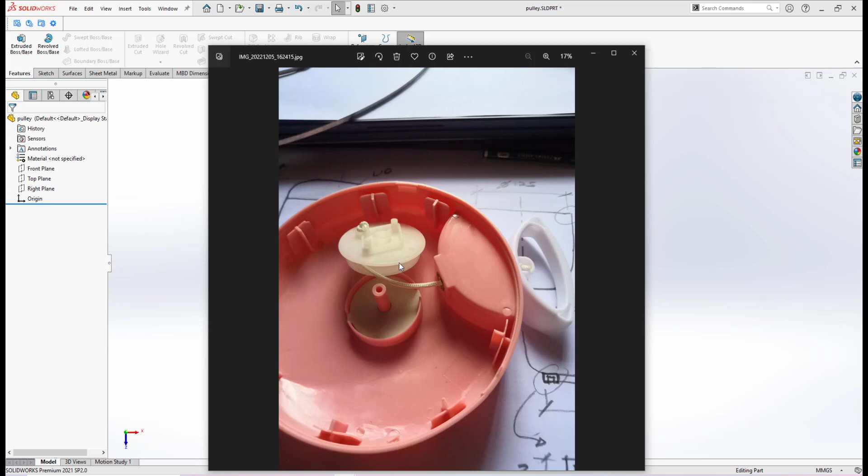In this video, I would like to show you how we do the modeling of this pulley for the rope. So if we look at this photo, this is the bottom view of the pulley, and this is the top view of the pulley.

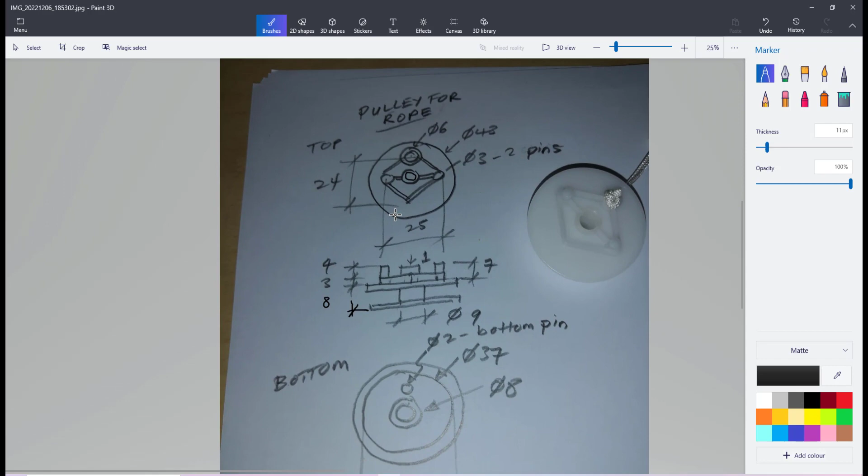I also have done some sketches with the dimensions of this pulley. This is the top view. The main diameter is 43. So we have two kinds of cylindrical plate: one at the top with diameter of 43, and at the bottom a cylindrical plate with diameter of 37.

Also, in the middle it is connected with the internal cylinder by diameter of 9. So this is a correction - I think this should be diameter 9, not 8, at the bottom here.

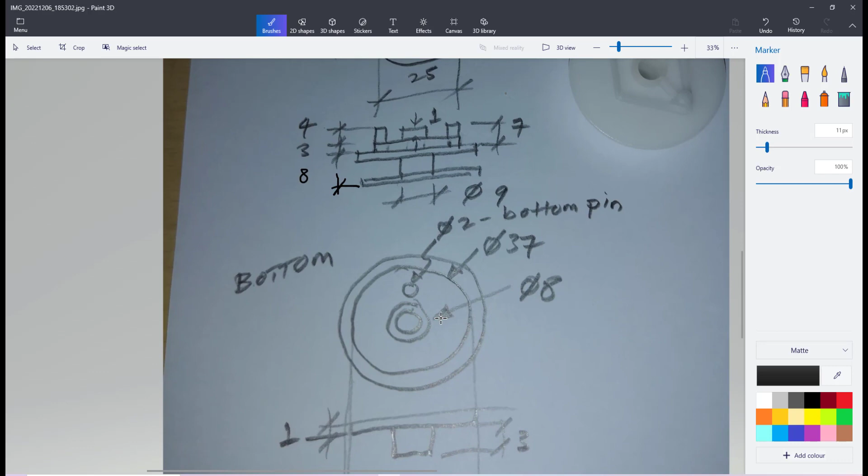Also if you look at the top features, if you look in this photo, we have a structure of a kind like this here. We have a thin wall here, and a cylinder, and also a protruded cylinder here. And we also have kind of a cross wall here.

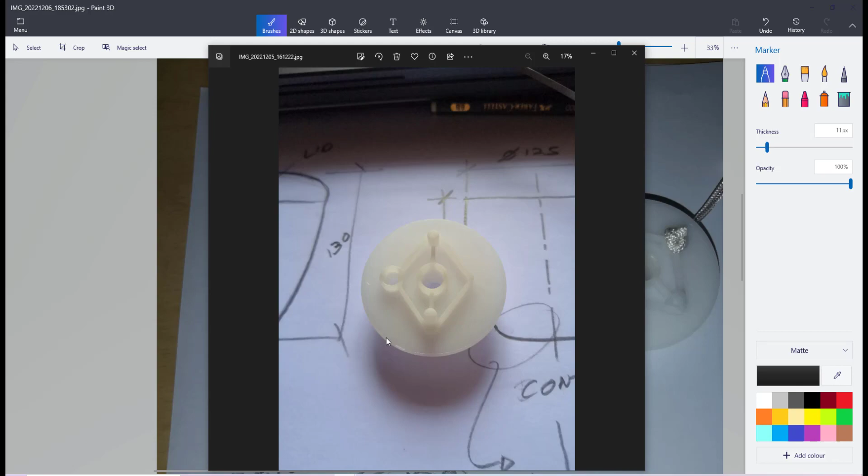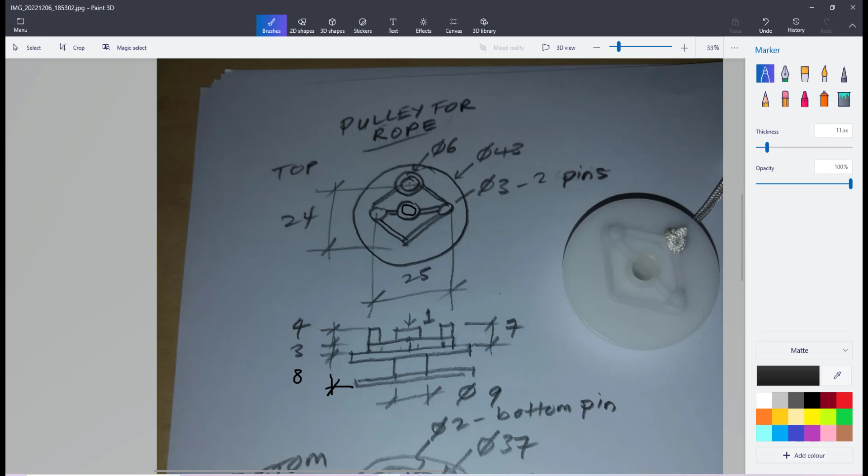So let me start doing this part modeling of the pulley. Start with a new file and make sure the unit is MMGS. Of course I will start at the top plate, then I will do the base plate. The top plate has a diameter of 43. Let me check again - yeah, the top one is 43, and I will extrude it by a distance of 1.

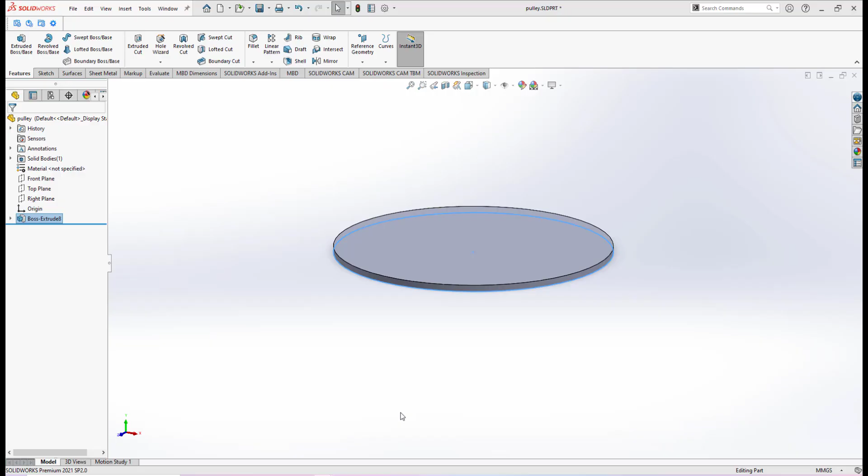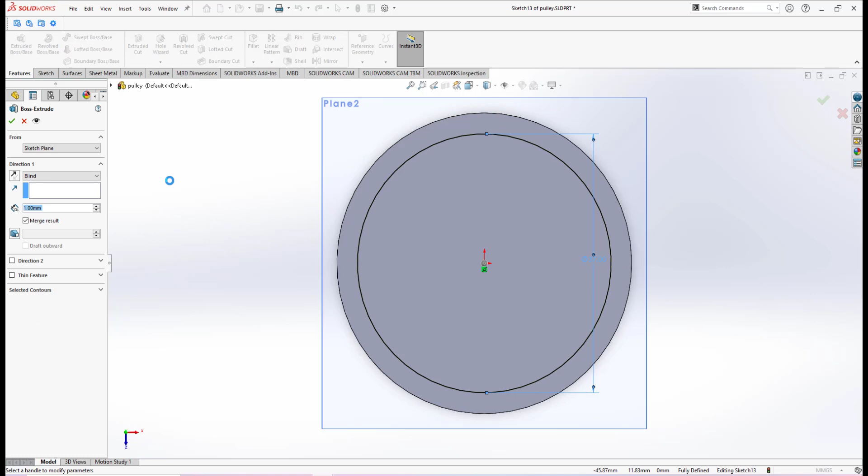Then I will do a bottom plate. If you look in this image, the bottom plate has a diameter of 37, and the distance from the top plate is 8. So I will use a plane here, at distance of 8, going to the bottom side. Then I will do a sketch, and do the bottom plate with diameter of 37, then extrude boss base upward by a distance of 1.

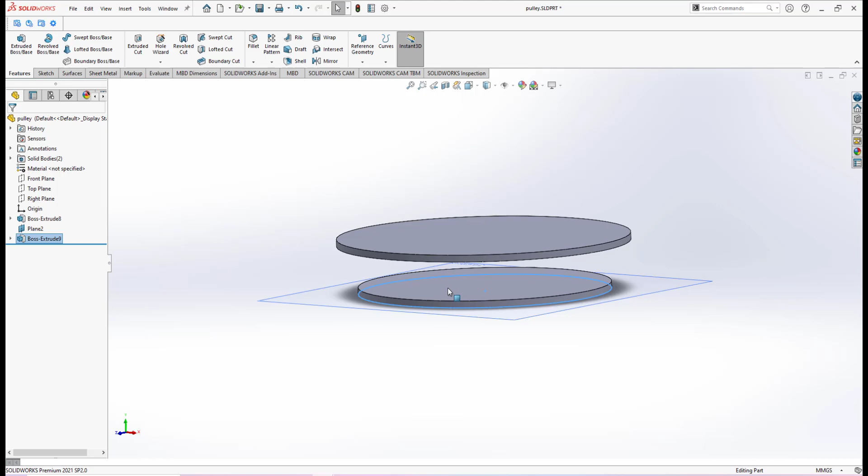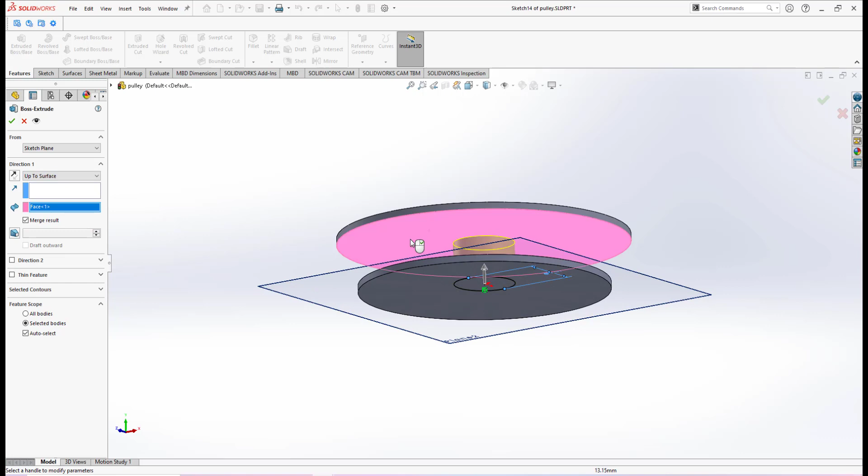Then I click OK. If you look again in the sketch, we have a connecting rod here in the middle with diameter of 9. I will use this plane here, diameter 9. Then I will do extruded boss base, but this time I will use the option up to surface. I click at this bottom surface, then it stops at that surface.

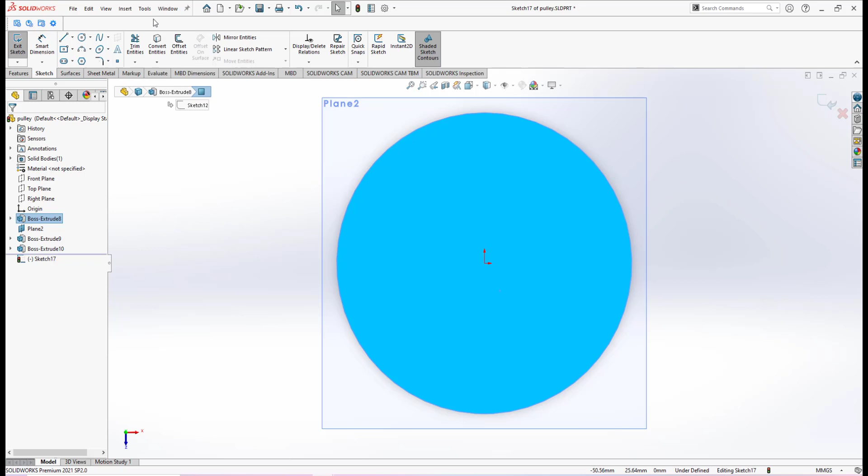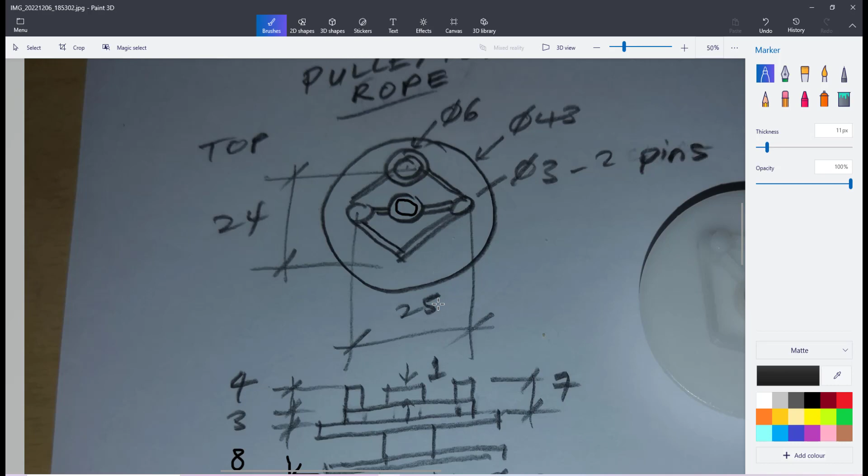The diameter of this cylinder - actually I forgot to add the dimension. The dimension of this middle cylinder is the same as the other middle cylinder, diameter of 9, and the height of this middle cylinder is about 3. It's the same level as the height of this thin wall. So the level of extrusion from this top surface is 3 for the middle cylinder. I will do extrude boss base by a distance of 3.

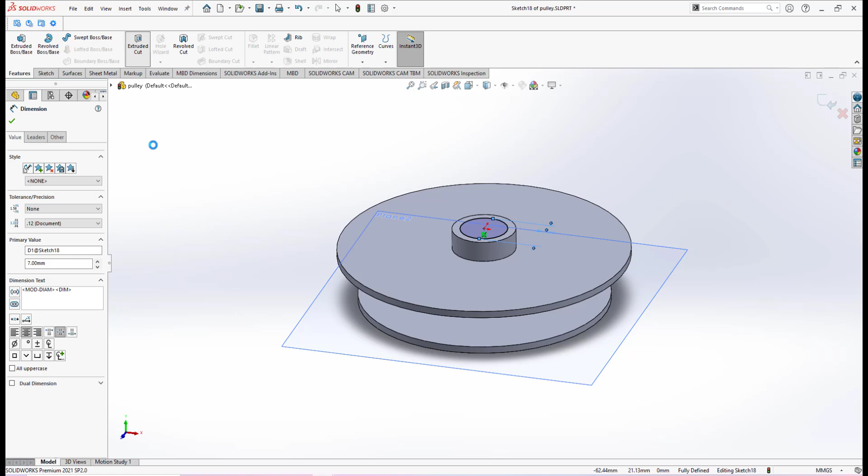Also, if you look, we have this hollow cylinder with a drill-through hole here. Since the thickness is 1, and the outer diameter is 9, the internal cylinder will be 7. Then I will do extruded cut through all. Then we have a hole there.

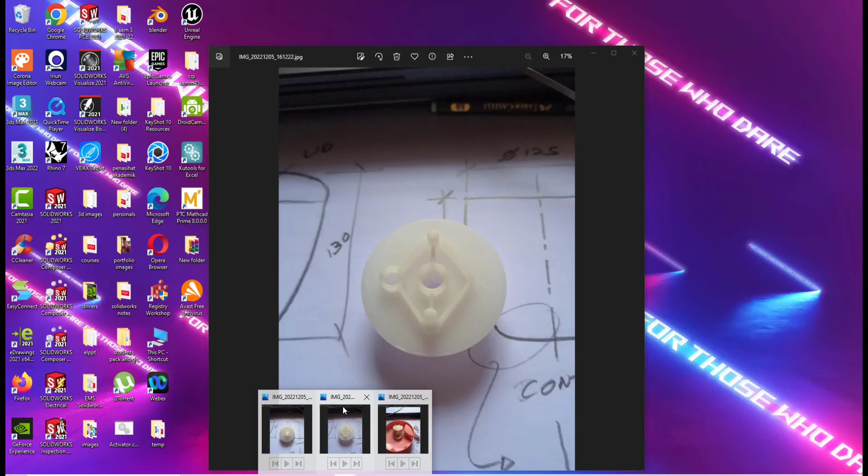Next thing to do - if you look in this image, we have a structure with 2 cylinders here. The distance between these 2 cylinders, if you look here, is 25, and the diameter of the cylinder is 3, and the height of the extrusion is 3 plus 4, which is 7.

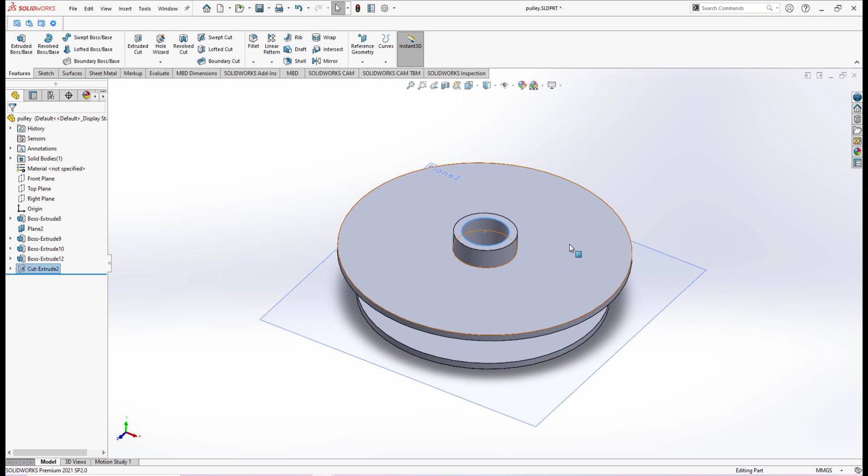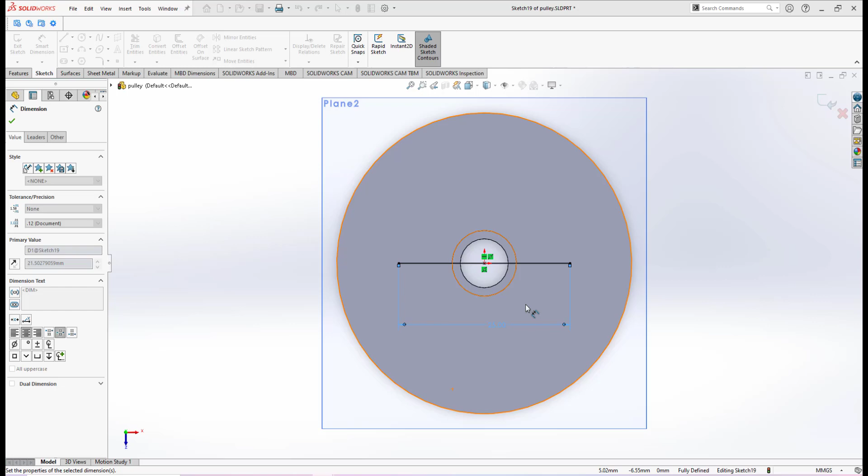So here, at this plane, I will create a midpoint line, make sure it is horizontal, and give it a dimension of 25. And I must set this to construction geometry.

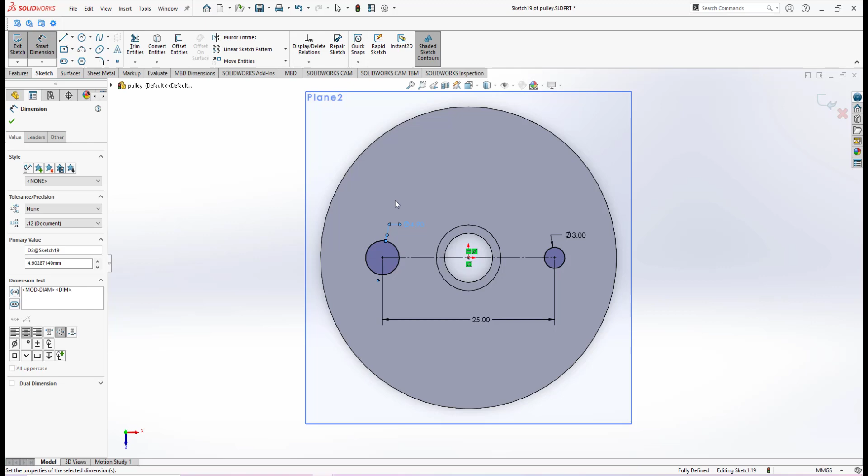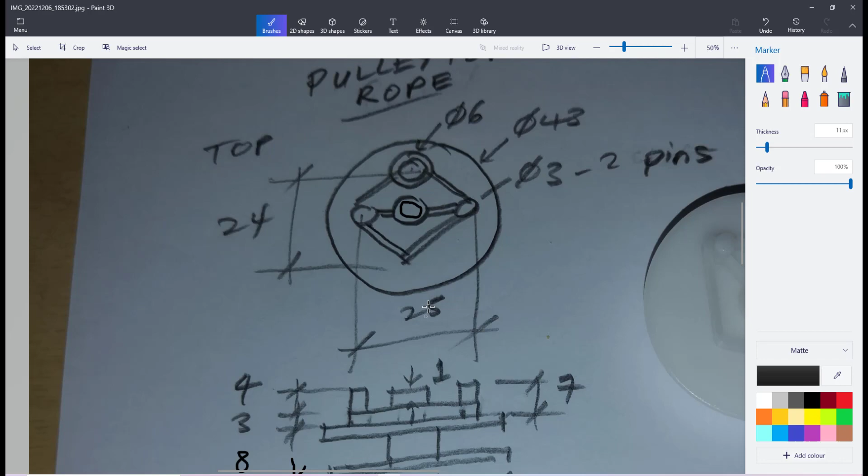If you look again in this sketch, we have another cylinder here, diameter 6, and it's a hollow cylinder, thickness 1, and the height of that is 3 plus 1 is 4. And the distance from here to this kind of structure is 24.

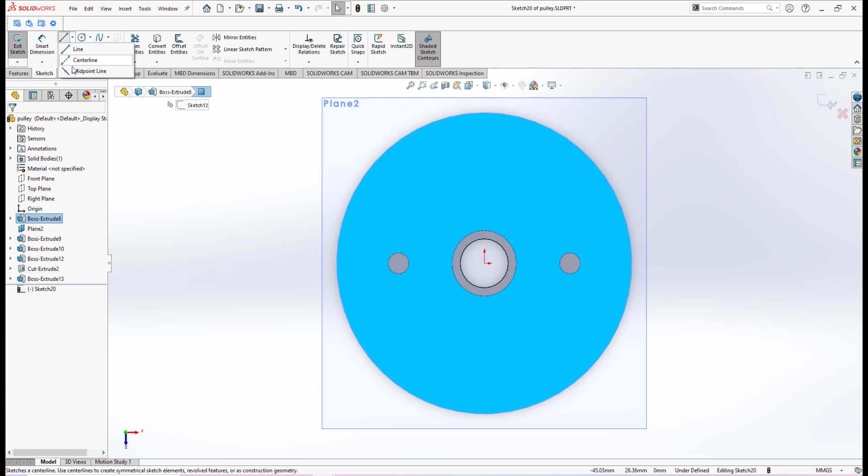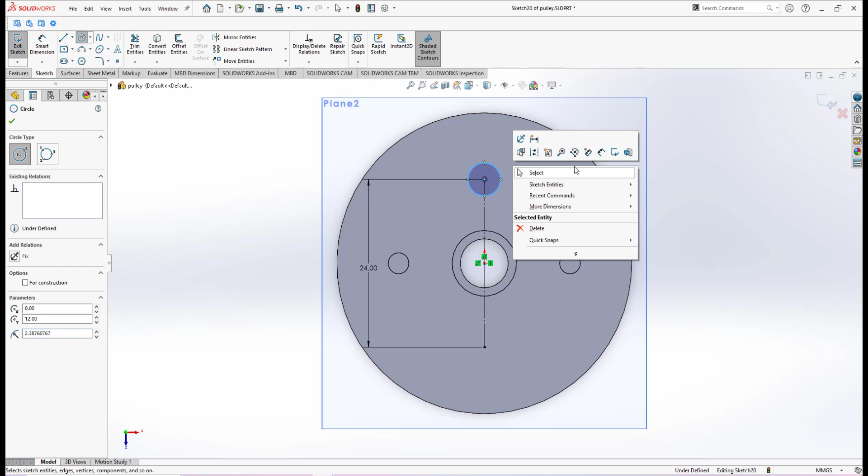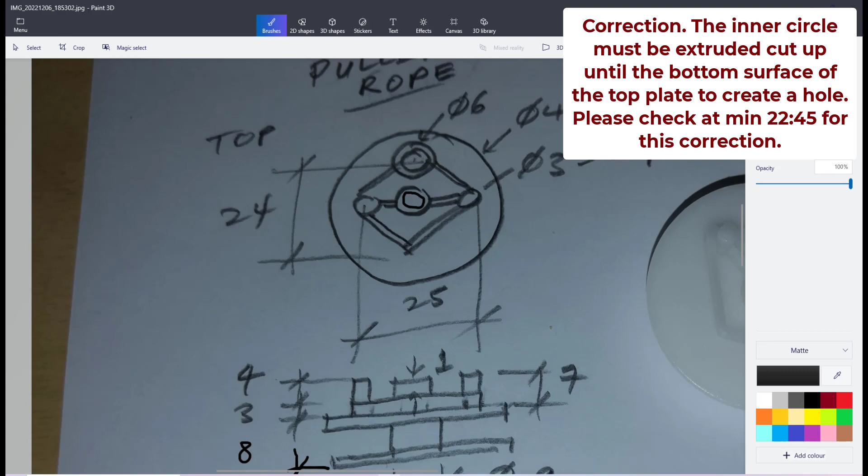Then I will do offset thickness 1, but go for reverse direction. Then I will extrude four. Alright.

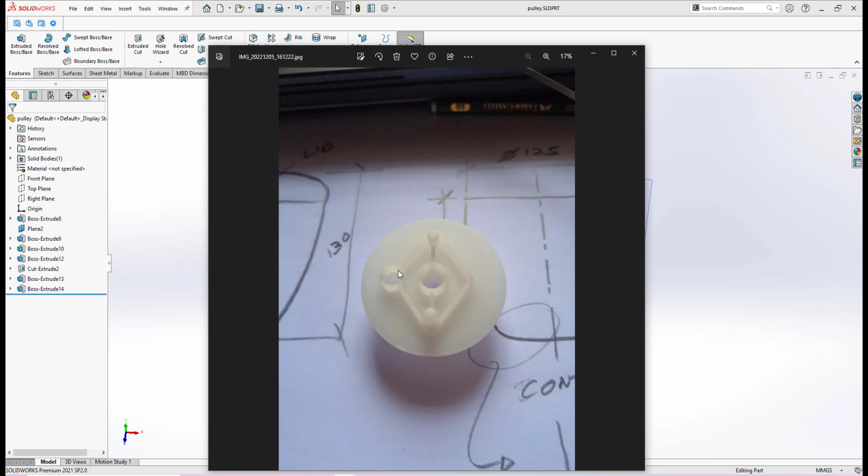Okay, to create this wall, if you look in this photo again, we have a thin wall here. For this thin wall, I will not use rib. I will use the most basic approach. I create a line. The wall, if I look at it carefully, the wall height is the same level as this protruding cylinder here. Level is 4, so I will create at this plane.

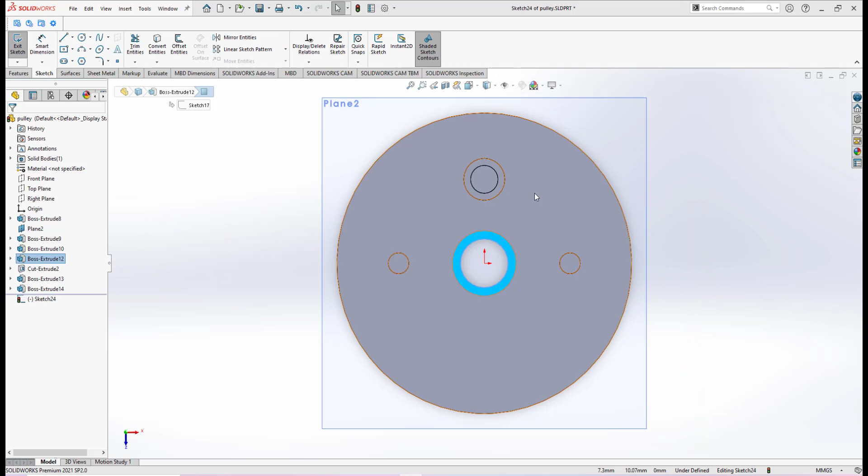So I make a correction here. The distance of this side is 3 and this one is 4. This one's supposed to be 3, not 4, so it will be at the same level. So to create the wall structure, I will do it at this plane. Okay, so I will create.

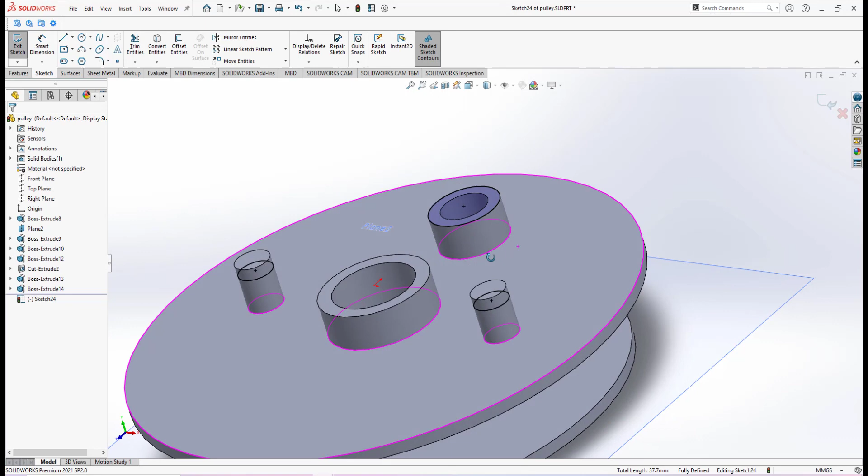The first thing to do is I select all the circular edges. Hold Control key and convert that to entity. So we have a trace, a trace circular, a trace circle from that circular edges. So what I will do, let me go to normal view. Then I will draw a line from this center point up until here.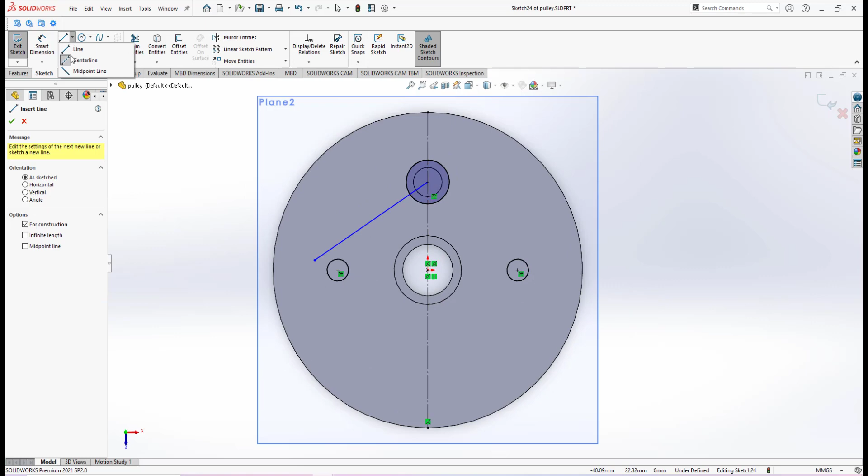Okay, I will do a midpoint line from this up until this quadrant, and I will change it to construction geometry. And also I will do a midpoint line from these two quadrants and change that to construction geometry.

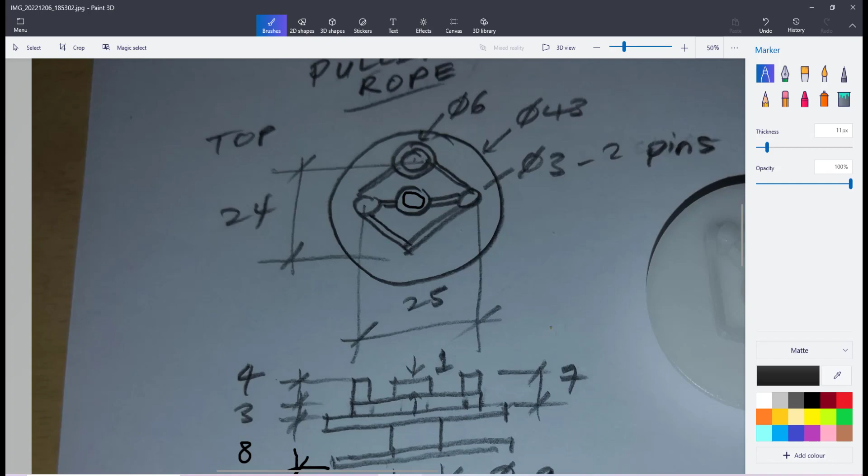Okay, I just need to draw another line at this point up until here. This line to the circle is tangent, and this line to the circular edge is also tangent. And we know the distance here is 24. So I give a distance from here to here of 24.

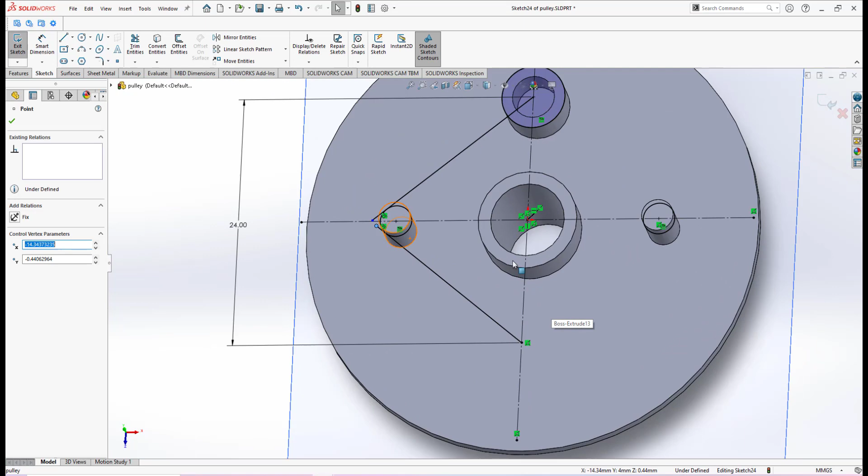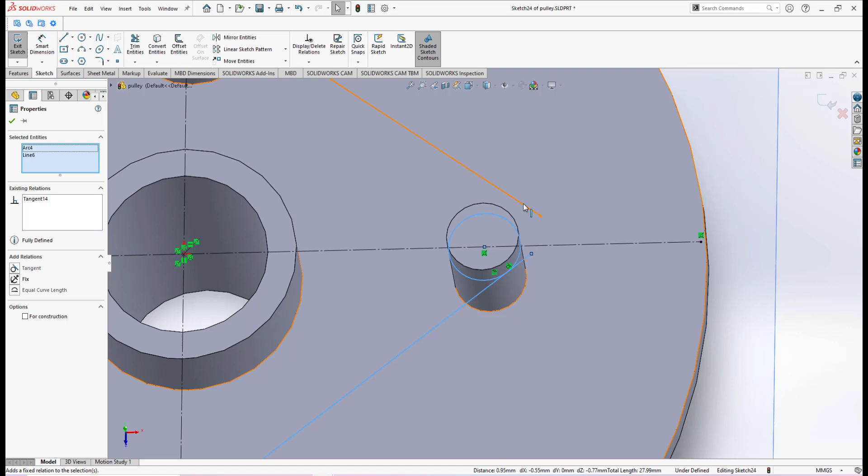Let me drag this point to make it a little shorter. Then I will do the same for the right side. I create a line from this center point up until here, and I draw this line up until here. Then I will make this tangent to this, and this one tangent to the circular edge.

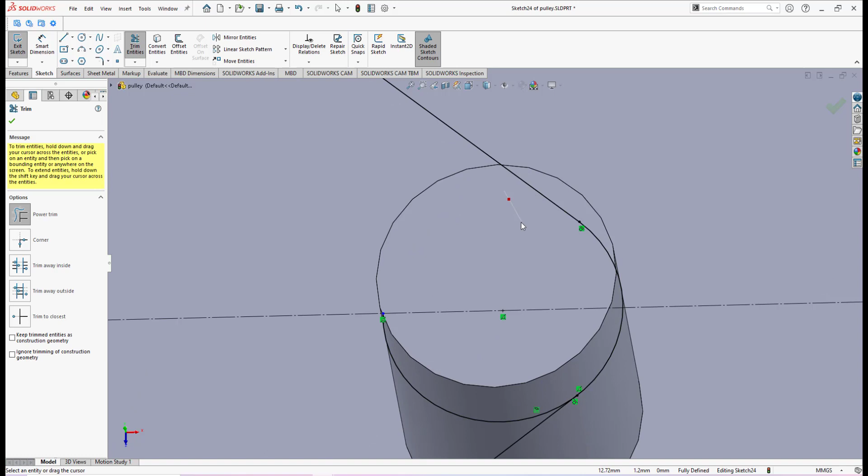Okay, now I will do trimming. I'll trim this portion, trim this segment, trim this side, trim this portion, and I will trim this portion and also the internal curve, and I have this kind of shape.

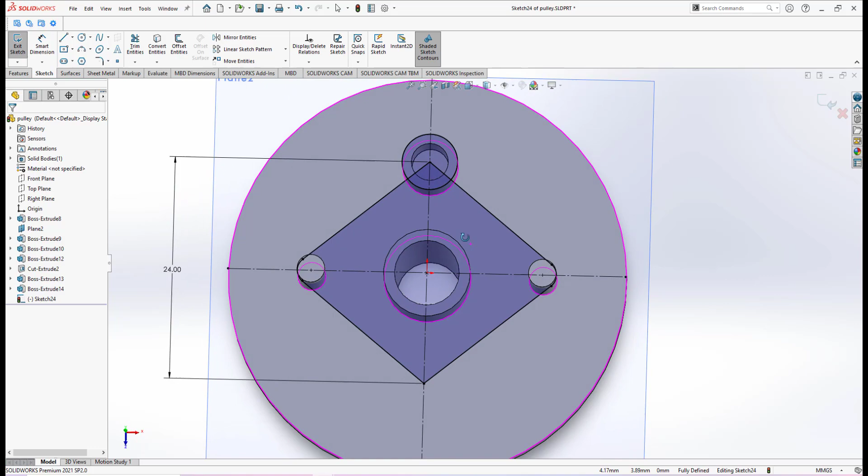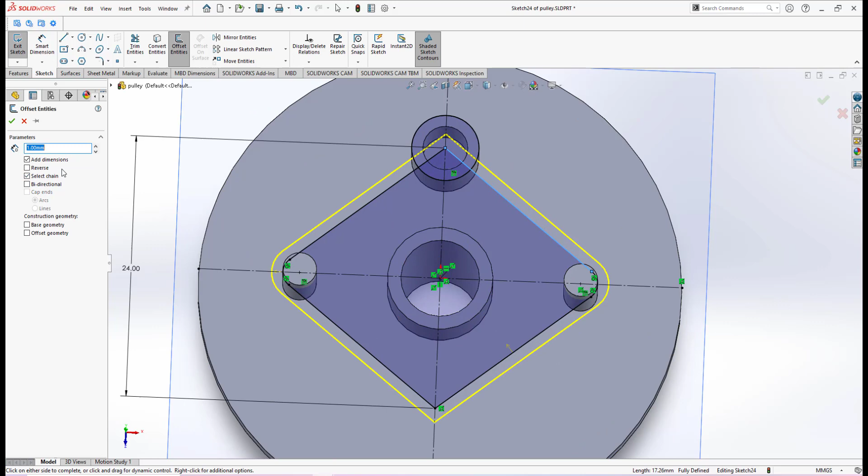Okay, since the thickness is 1, what I will do is an offset of distance 1. I select this line, make sure the select chain is on. If not, it will only detect one segment. Select chain is on, so it will detect all the closed loop. And the distance is 1. It goes reverse, it goes inward — make sure it goes outward instead. Then I will click OK.

So I have this profile for me to do boss extrude. So under features here, I will do extrude boss base. Okay, for this one, please take note on this. This is also very important.

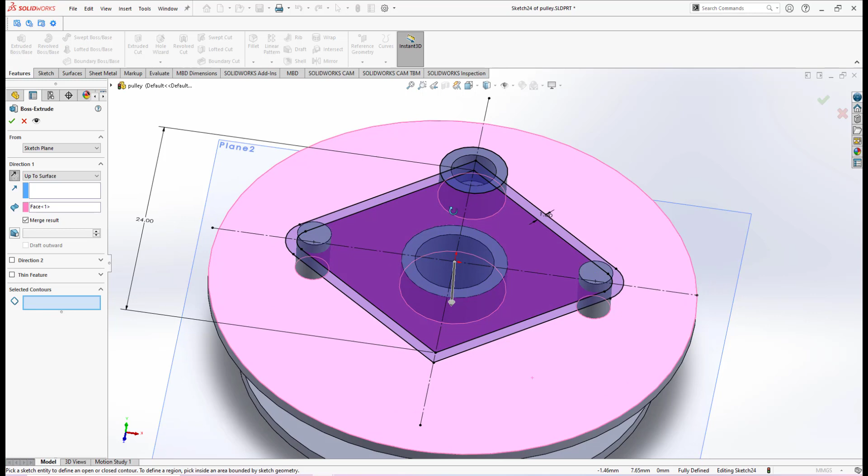I'm using direction downward. I'm using blind up to surface. Now I click the surface. Okay, under here, this is very important. Do not use this — I have to use contours, selected contours. So I select the portion that I need, only this portion that I need to extrude to the surface.

Then I click OK. So I have these thin wall features like as shown in this photo. Alright, let me save my file.

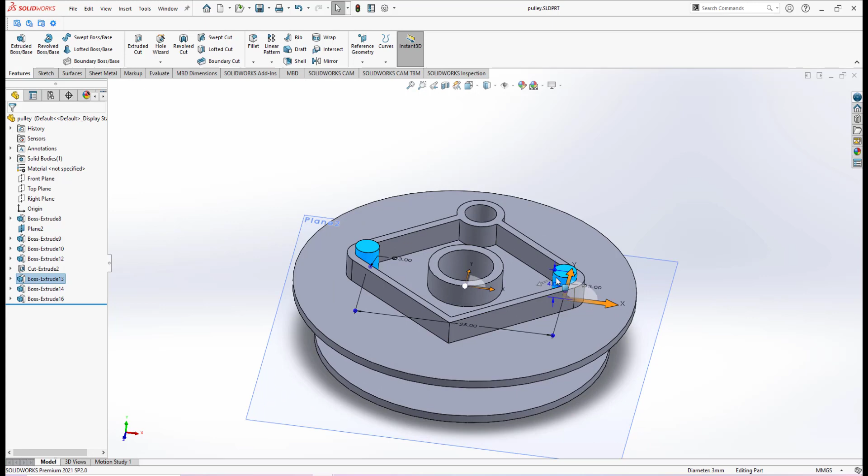Okay, I need to make some adjustment here. Actually this rod, if I already made it, the height is 4, but actually the height of that rod is 3 plus 4 is 7, so I need to make an adjustment. Seven. So actually it's a little bit longer.

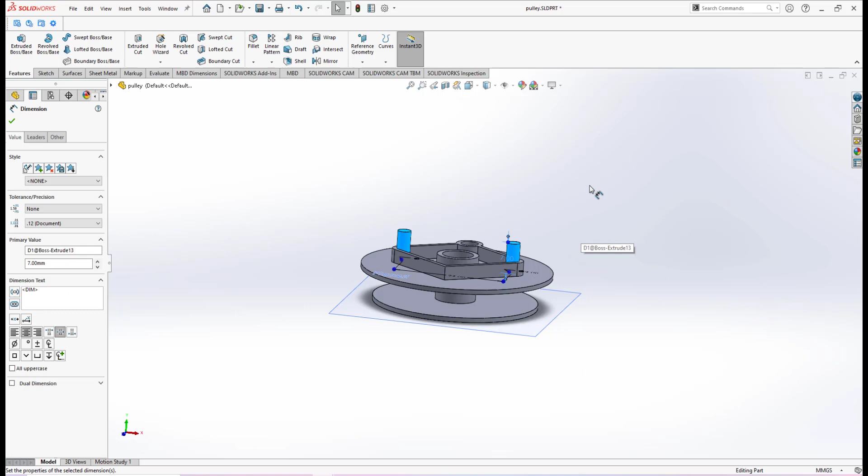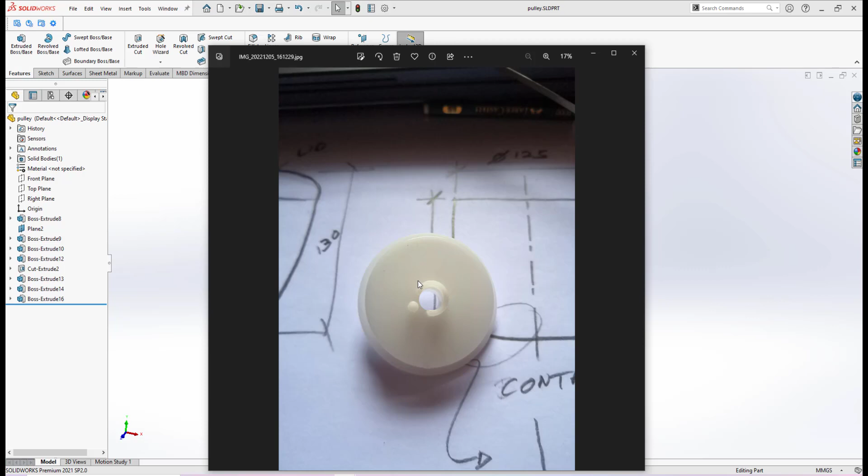Alright, the next thing to do, I have already completed the top parts of this pulley. If you look at the photo of the bottom view of this pulley, we have these features. So in Solidworks, I will go for this bottom plate.

So I create a sketch at this plane. If you look in this sketch, this bottom view of the pulley, we have an extruded cylinder here. The diameter, let me question this, actually not 9 — this one must be, this diameter is supposed to be diameter 9 as well, and thickness is 1, the hollow cylinder.

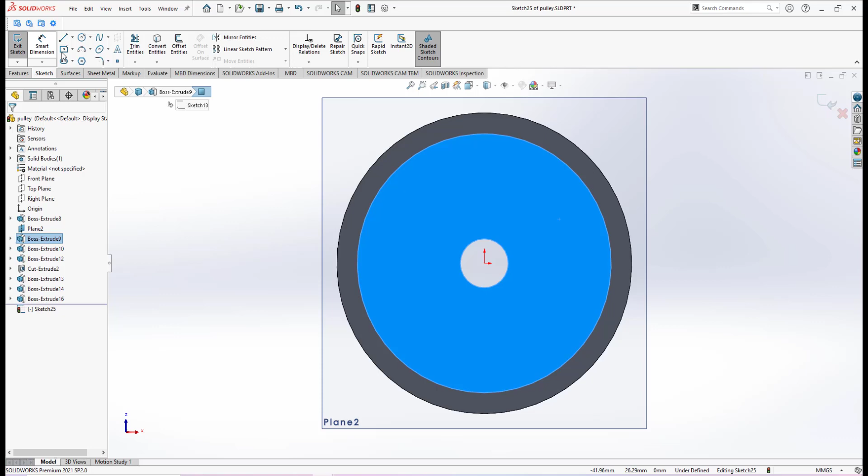So by extrude by 3. In this plane, I can select these edges, convert to entities, and also do offset of 1. Then I will extrude by the distance of 3. So we have an extruded cylinder there.

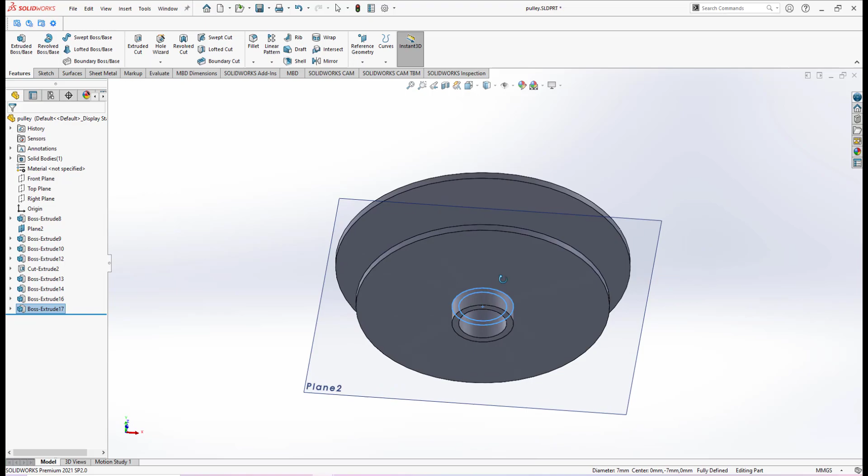Alright, the next move — if we look at the photo of this bottom view of this pulley, we have this extruded cylinder with a cutout at a certain angle. So let me make that cutout.

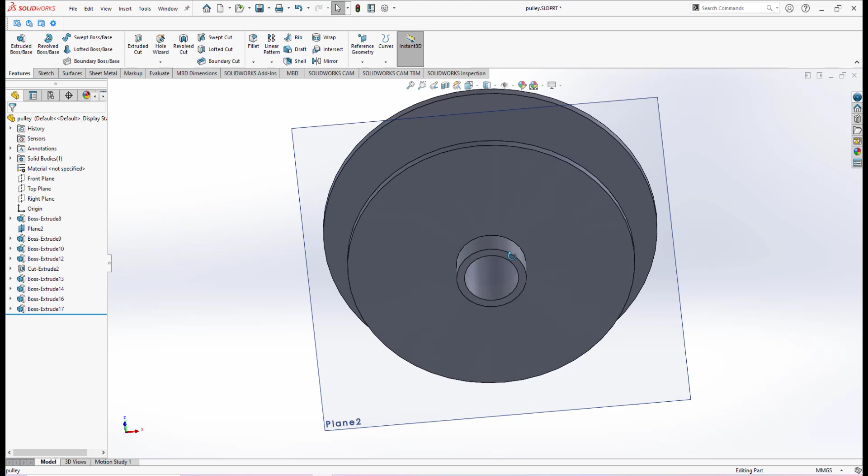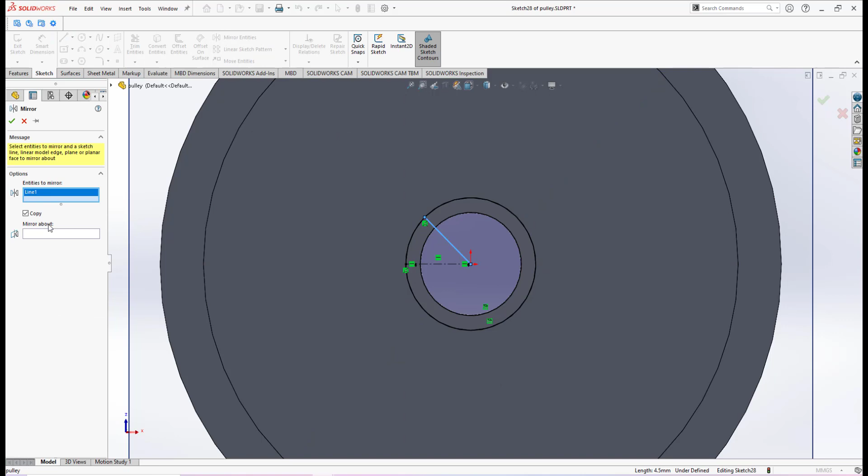Let me check, okay, I will do it at this plane. First, I select these 2 edges of the circular edge, convert to entities. Let me go to normal view. Then I will draw a line up until it touches the circular edges. Then I do a center line from this point to this quadrant, and make a mirror of this line about the center line.

Let me give a proper angle — I think it's about 45 degrees. Let me drag it a bit. Then I will do some trimming here — I trim this portion, and also this part needs to be trimmed. I click OK.

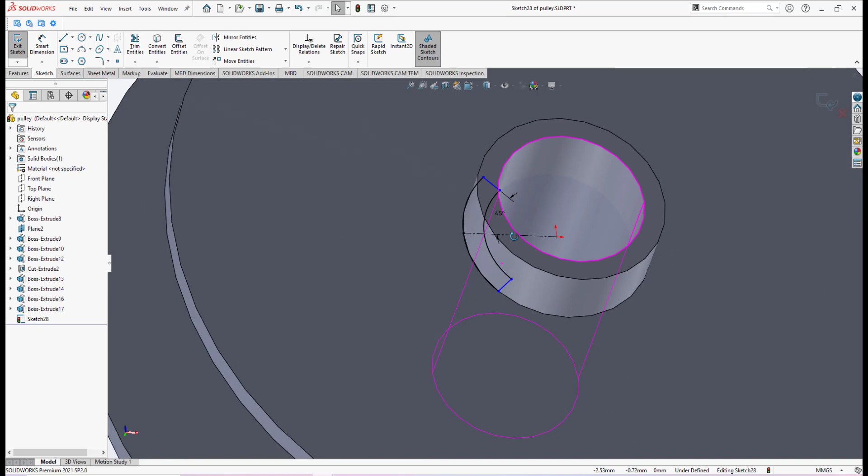Alright, we have lost the relation here, so I need to select this one, and the center point needs to be coincident, and also this line and this center point need to be coincident, so we have fully defined.

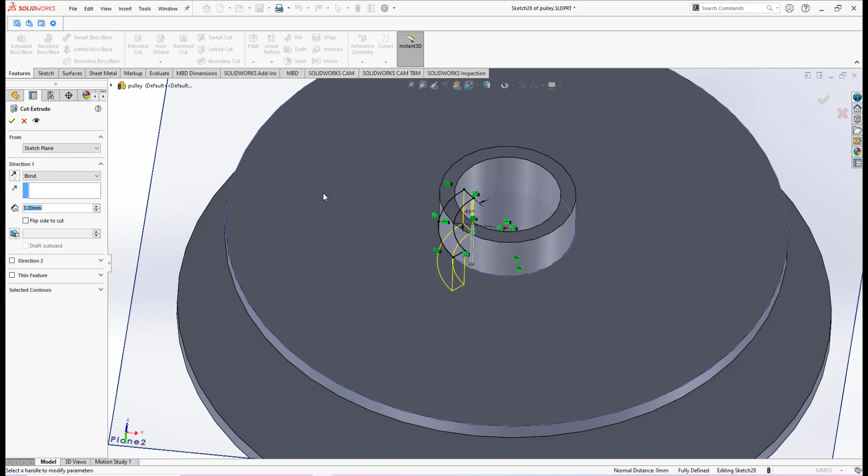Okay, for this feature I will do extruded cut. Direction is upward, and make sure it's throughout. Then I have the cutout.

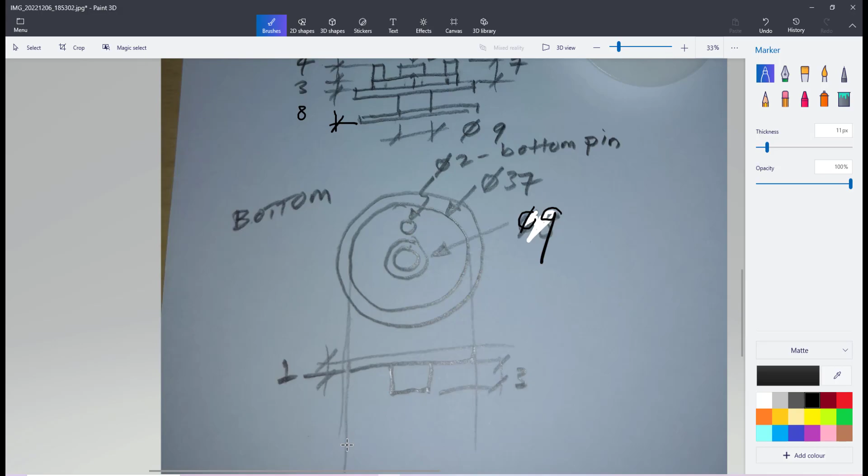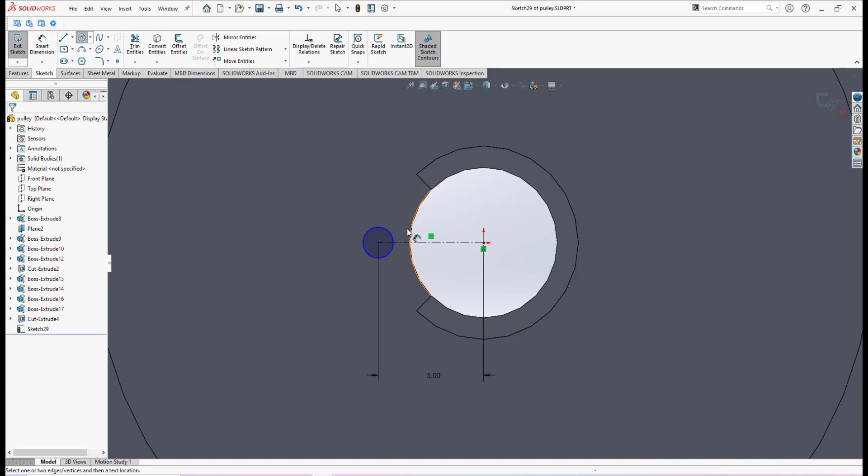Okay, next thing is we have a small shaft here. The diameter, if you look at my sketch, is 2. At this plane again I make a sketch, creating a center line from here up until the position. Since the outer diameter is 9, let's put some dimension — sorry, the radius is supposed to be 5, and I will do a circle of diameter 2.

Let me extrude up to surface. So I have this small shaft here.

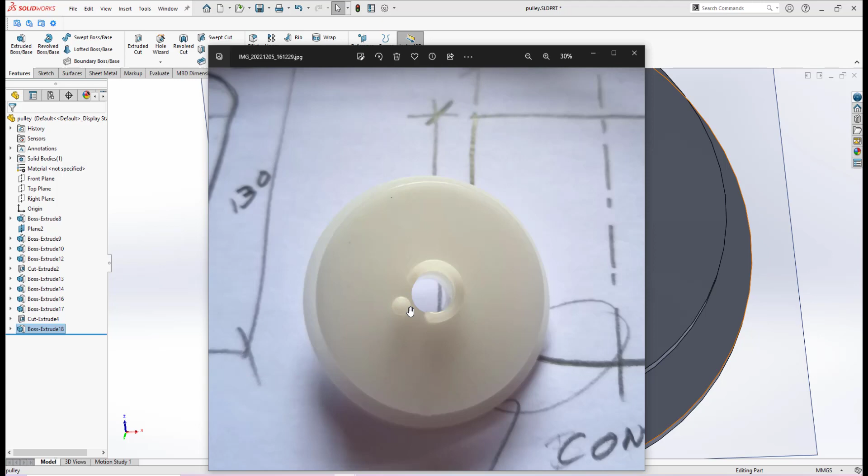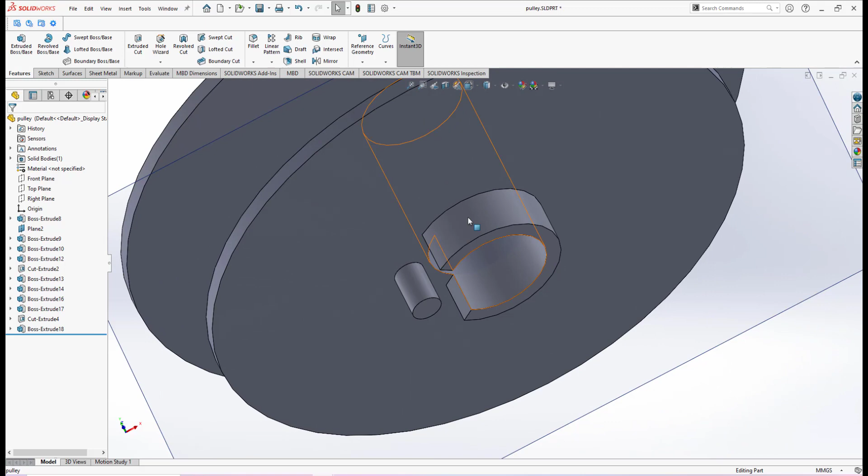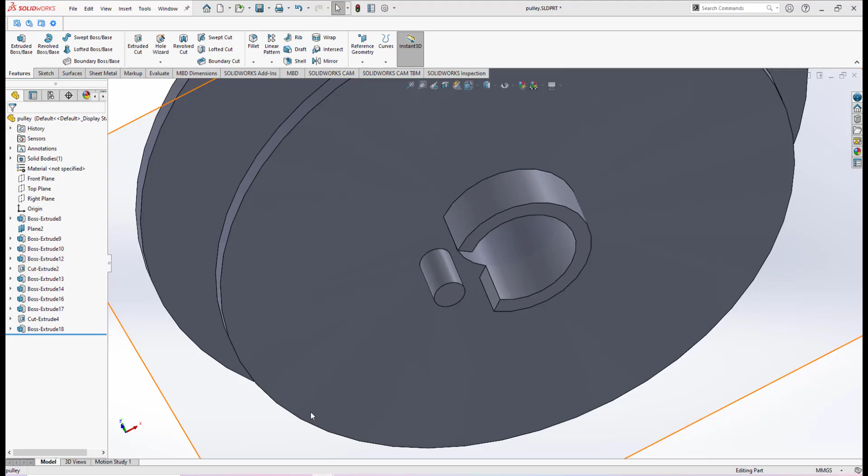Just to tell you, since this is the bottom of the pulley, this shaft component is meant for us to have a coil spring wrapped around here. One end of the coil spring will be hooked on the shaft and wrap in a coil shape spiral, and the other end of the coil spring will be hooked on this hook, on this slot of the lid. So we have a coil spring there.

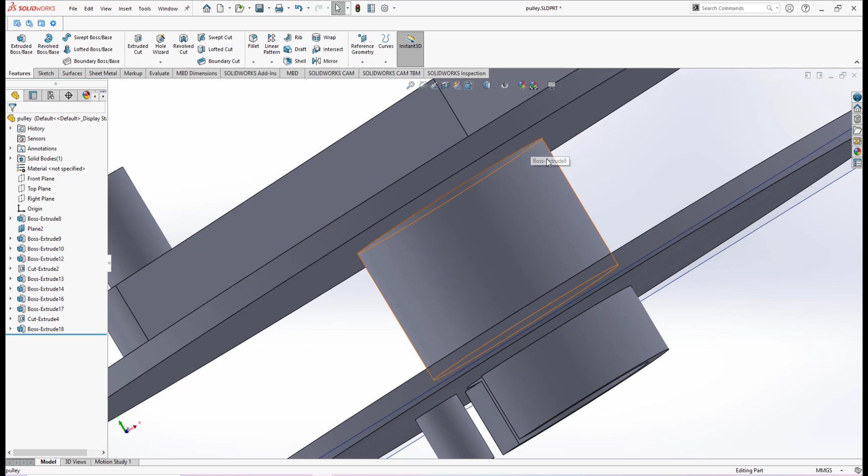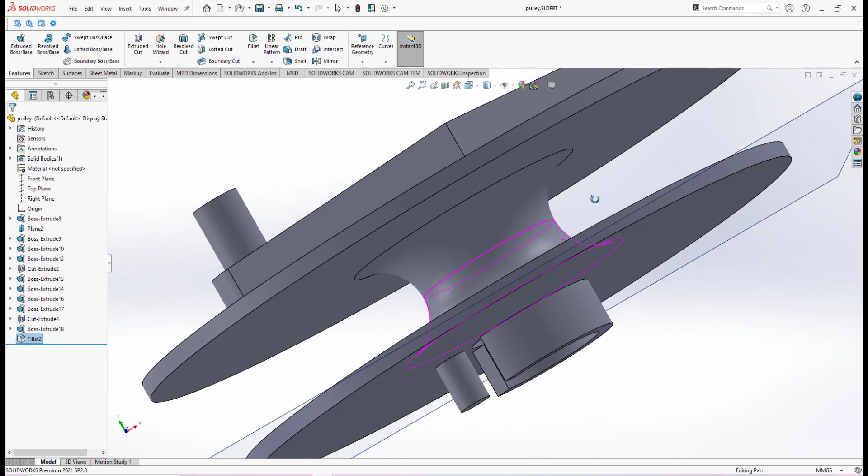Alright, let me check — the last thing to do for this pulley: if you look at this middle cylinder here, since a rope will be wrapped around the cylinder, it's better if we make these edges with a curved surface. So we need to fillet, with a fillet radius of 3. I select these 2 circular edges, so we have more of a curved surface, making it easier for the rope to wrap rather than having straight edges.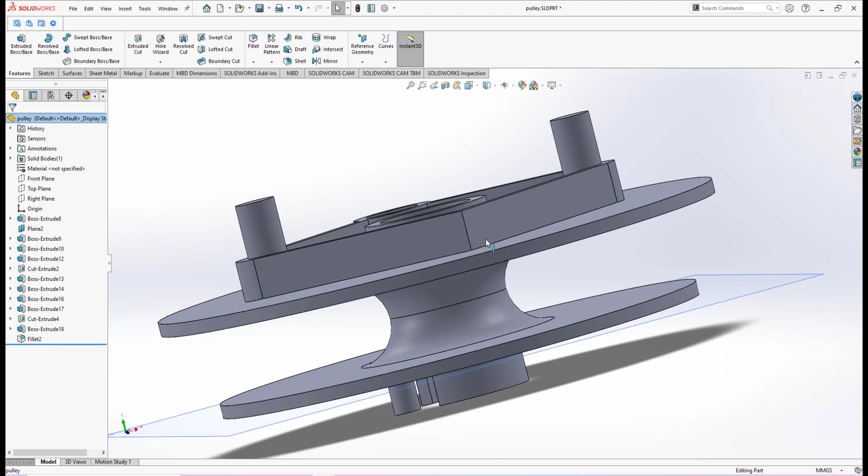Okay, let me make a final check of this part modeling. I think I made a minor mistake here — actually, this hole should not stop at the surface. It needs to be cut through, up until the surface, because since the rope will be wrapped around the pulley, one end of the rope will pass through this hole and there will be a knot at the end of the rope, so it will be locked at this cylinder, and the other end of the rope will be directly connected to the handle.

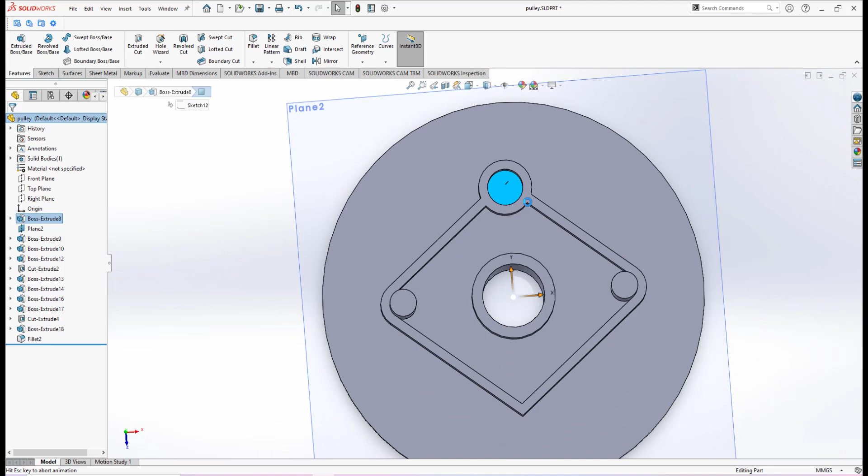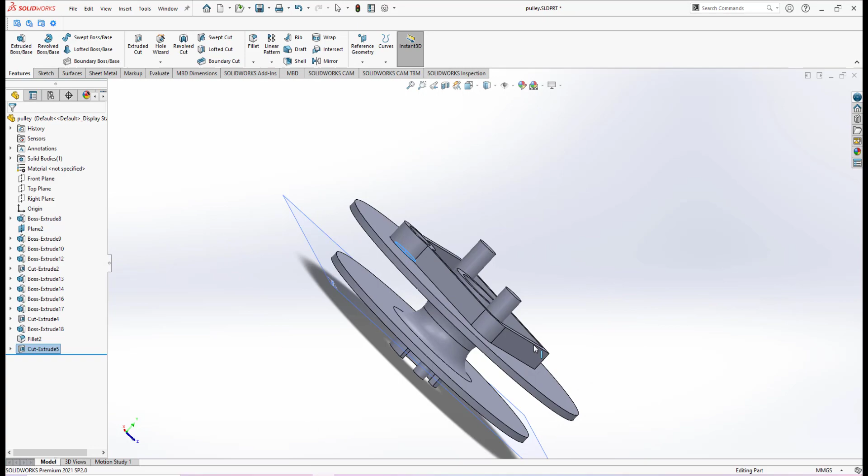So what I will do here is, at this sketch plane, I create a sketch, trace these circular edges, convert to entities, and do an extruded cut using up to surface. Then I click OK. So now we have holes there for the rope to be passed through.

Alright, I think that's all for the modeling of this pulley. Alhamdulillah, I've completed this part modeling of this pulley for the rope.

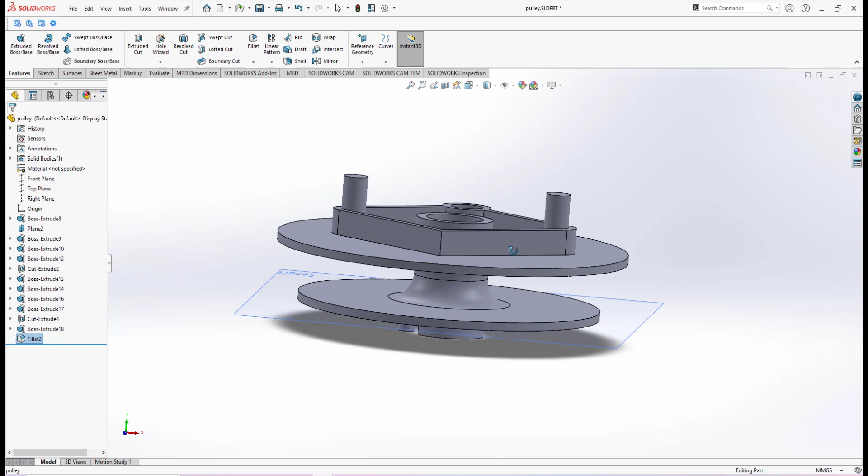So inshallah, in the next video I will show you how I do part modeling for the internal gears and also the other components.